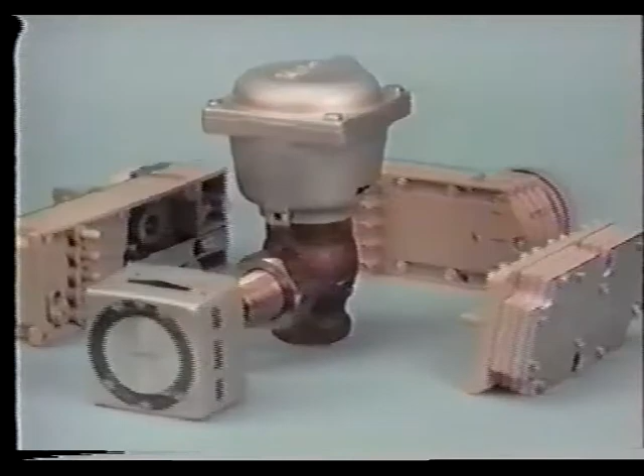Our intent is to cover both the concept and operation of the individual devices used within a commercial pneumatic control system. This discussion will be concerned primarily with Robertshaw devices and other related items.

These include Kellogg air compressors and refrigerated air dryers, Watts regulators and filtration devices, which are manufactured by our sister companies. The principles involved in this discussion apply to competitive devices as well.

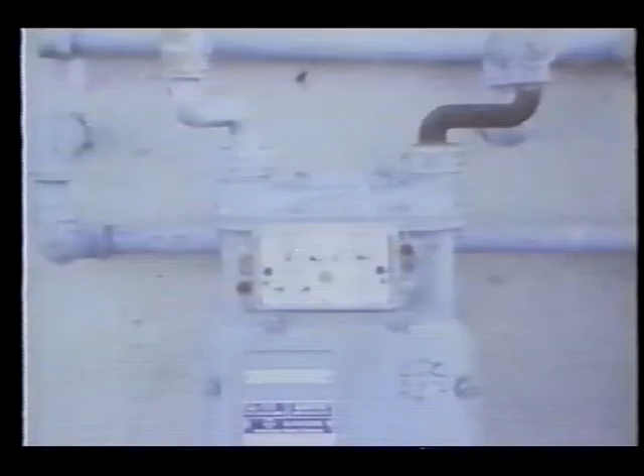Pneumatic controls are used primarily in commercial and institutional buildings. In recent years, the need for more energy-efficient control has become a major concern.

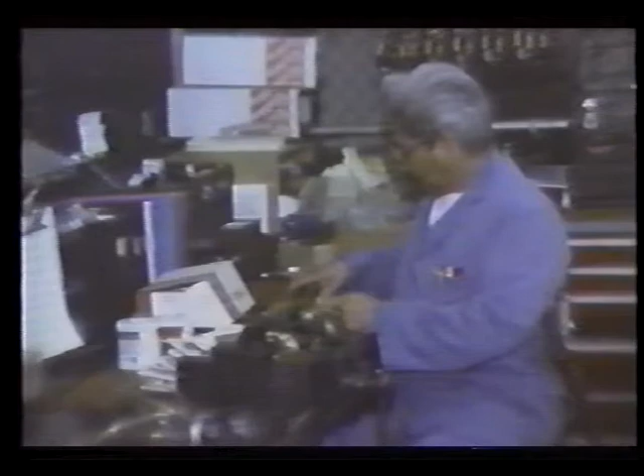In commercial or industrial buildings of a few thousand to several hundred thousand square feet, efficient control of energy is vital. Additionally, these installations have varying comfort demands that may involve the control of many individual systems and subsystems.

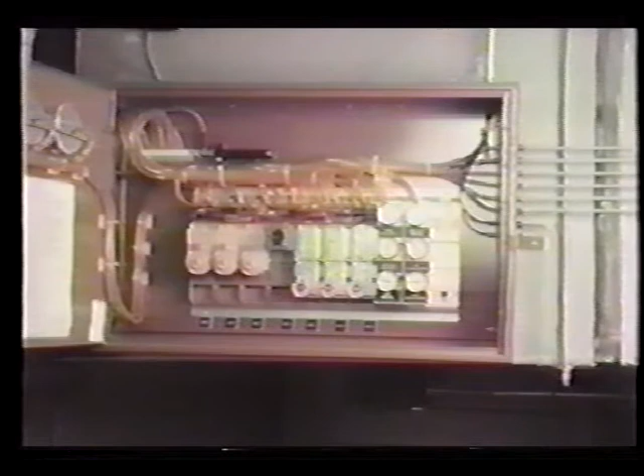Robertshaw pneumatic control systems provide an efficient method of control used in commercial applications because they can adequately meet the changing comfort demands in increasingly complex building designs.

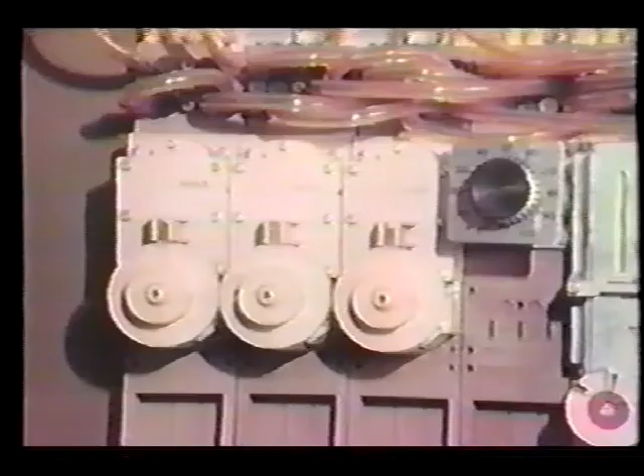Our controls are able to meet modern requirements for many reasons, including the ability to modulate, lower initial cost, ease of installation, and long life.

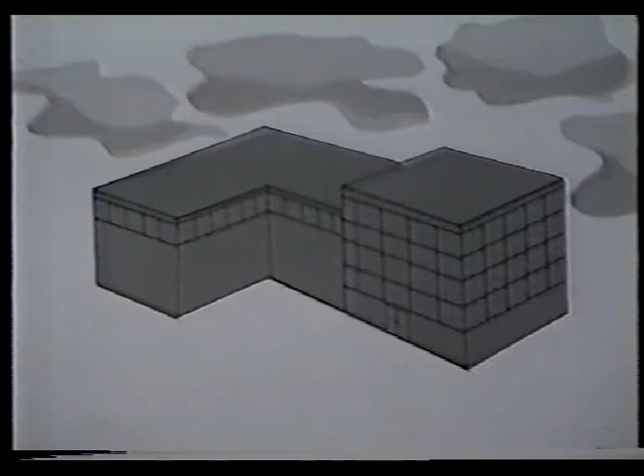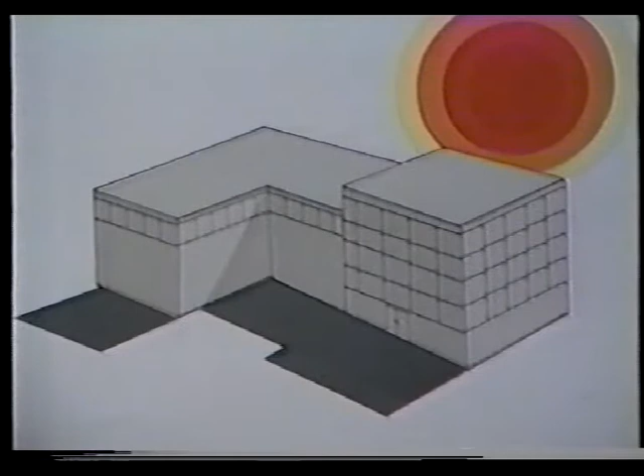The ability of pneumatic controls to modulate allows the control system to adapt to varying loads, thus providing the required degree of comfort. To illustrate the ability to modulate, let's compare it with on-off control of a damper.

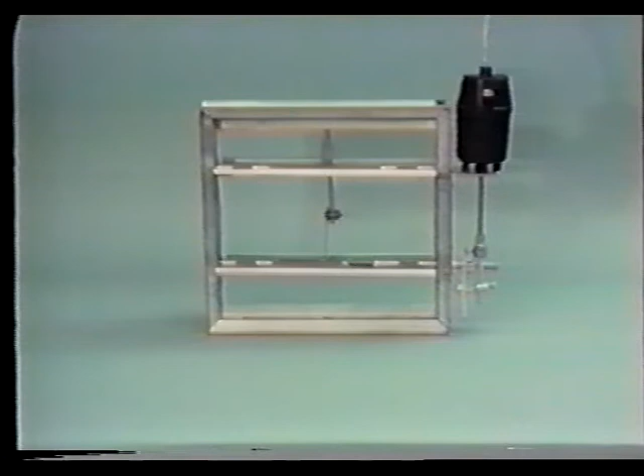Let's compare that to the motion of a modulating damper. Notice the slight movements rather than the sudden opening or closing. These slight movements represent a gradual response to the change in demand and allow only enough flow to meet the need.

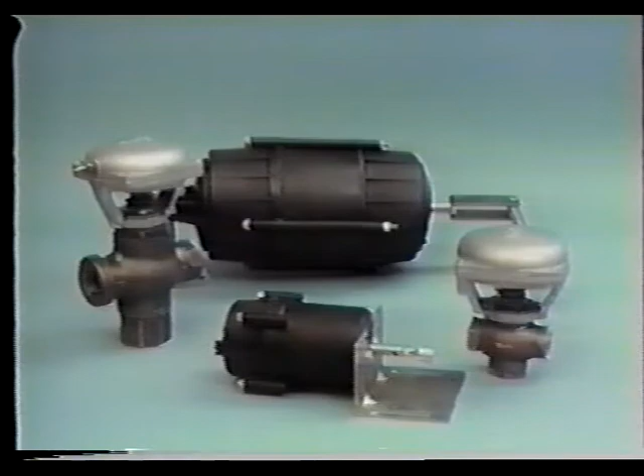Individual pneumatic devices are generally less expensive than similar electric or electronic items, particularly damper actuators and valves. The cost savings on these individual items in a system more than offset the cost of the compressor station.

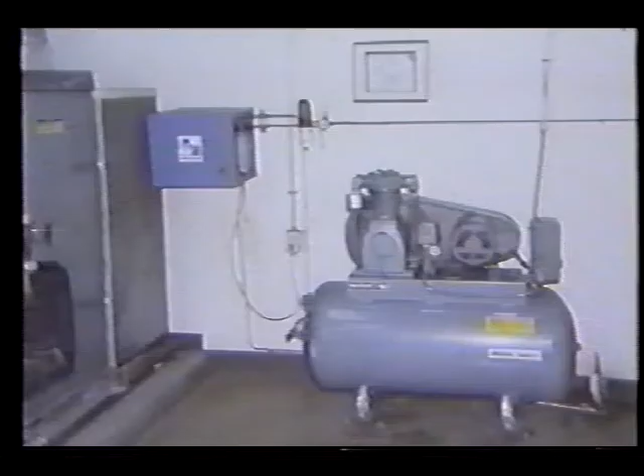Installation of a pneumatic system is often less expensive than a similar electrical system. This is particularly true in areas where building codes require all low-voltage wiring to be run in conduit.

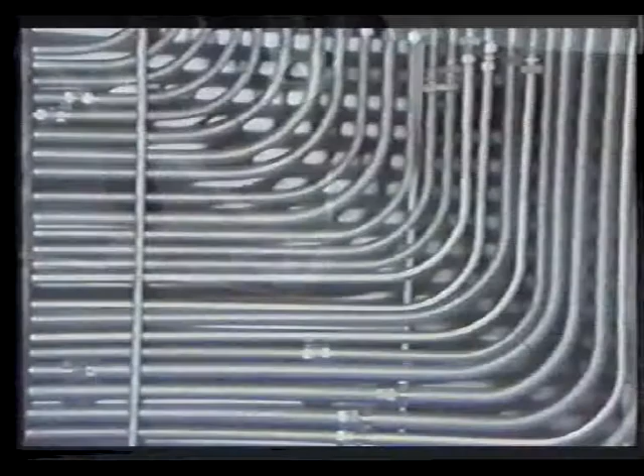The larger the system, the more economical pneumatic controls become. A pneumatic control system that is properly installed and maintained will provide long-term reliability and savings.

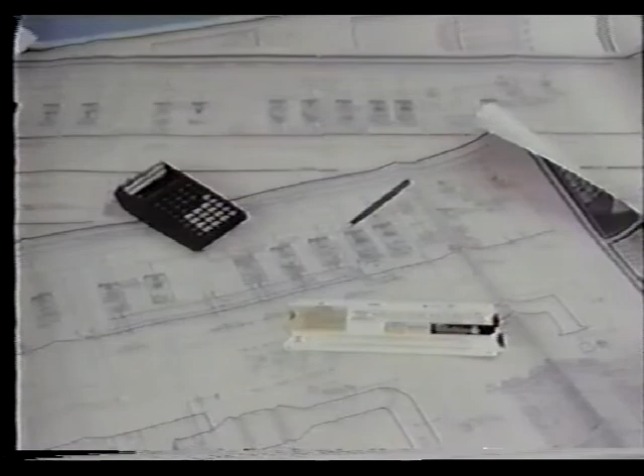The purpose of this presentation is to simplify the operation of complex pneumatic systems. We'll achieve this by taking a system and reducing it to the operation and application of the individual devices.

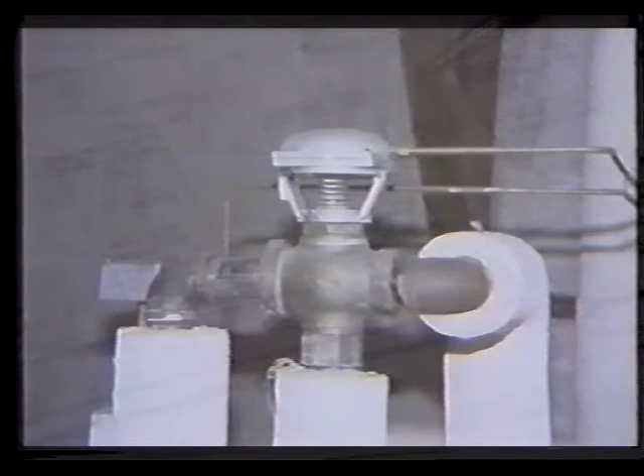By using this simplified method and simple components, even the most complex control strategy can be achieved with reliability and accuracy. The components of a pneumatic control system include an air supply and a mixture of controllers, relays, and switches operating as controlled and controlling units to produce a desired effect.

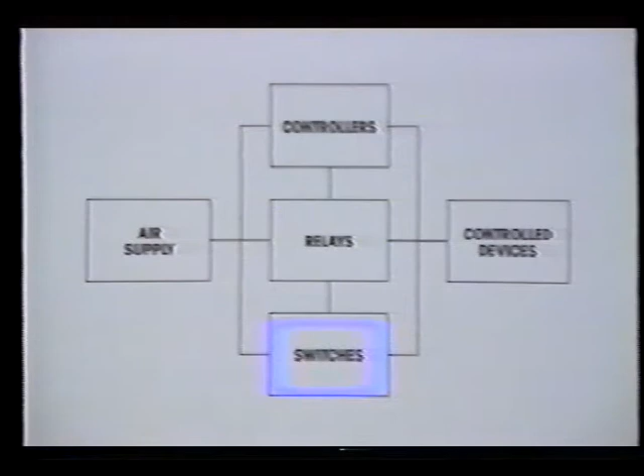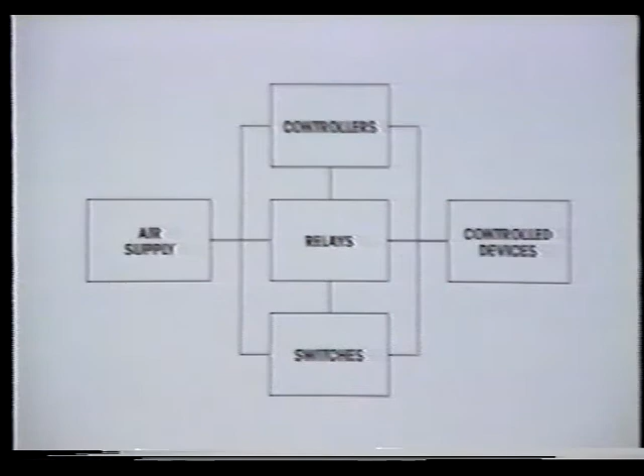The power for a pneumatic control system is derived from compressed air. Air as a power source can be compared to the supply of electricity at a given voltage, which powers an electric or electronic control system.

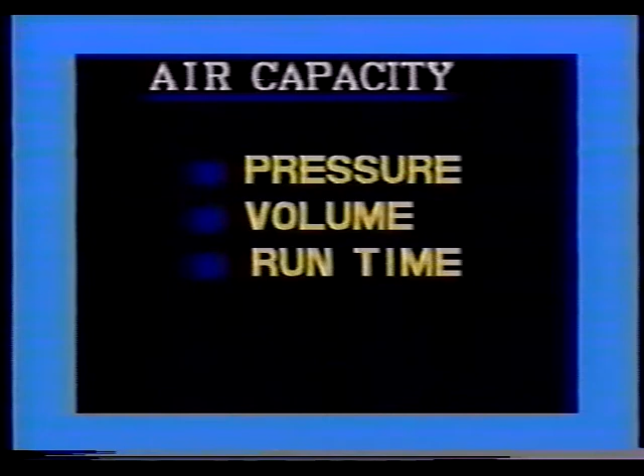Most pneumatic control systems require a constant pressure between 15 and 25 psig to operate properly.

This pressure must be stable, however, it will tolerate minor fluctuations when devices change position and air is bled off to the atmosphere. The volume of air required in a pneumatic control system is determined by the air usage of the devices in that system.

Air volume is measured in standard cubic feet per minute or standard cubic inches per minute.

Air mains and branch lines within the system must be sized to provide an adequate volume of air to remote areas without excessive pressure losses.

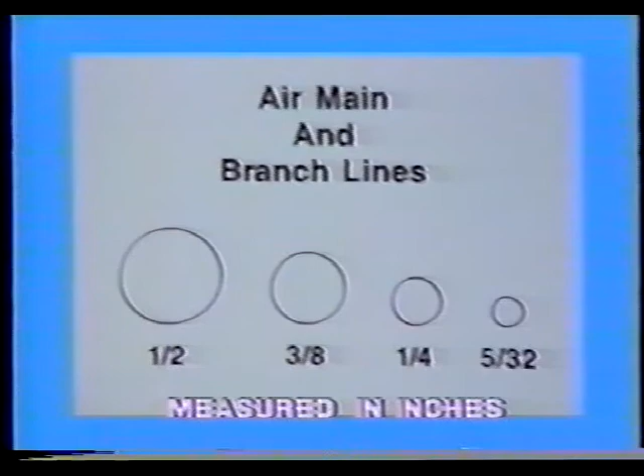Compressors and their receiver tanks are generally sized so that the compressor does not run more than 1/3 to 1/2 of the time. The primary system or compressor station is made up of a number of individual components to provide clean, dry, and oil-free air to the pneumatic control system.

Let's take a moment and discuss the individual components of the compressor station.

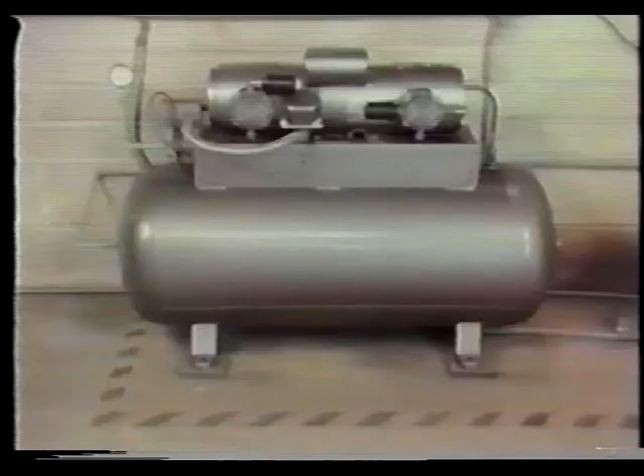Compressors used for a pneumatic temperature control system are often referred to as temperature control compressors or instrument air compressors. Temperature control compressors generally run at a lower RPM. This contributes to cooler running temperatures, less oil carryover into the compressed air supply, and longer life of the compressor.

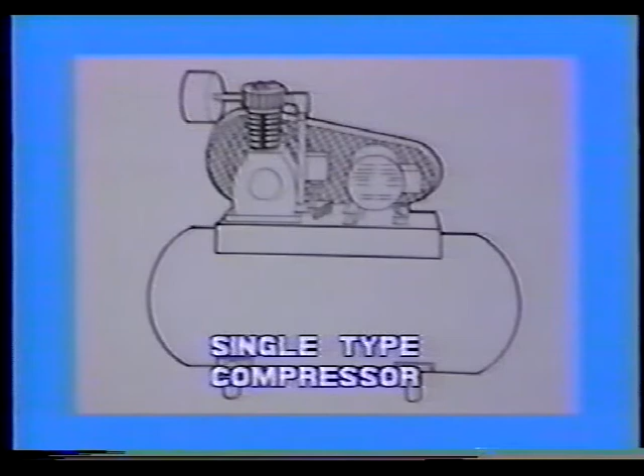A variety of sizes and configurations may be found, with single compressors on smaller systems and duplex type units on larger systems to allow for alternate compressor operation. Most pneumatic systems can be serviced with a compressor rated less than 25 horsepower.

Most compressors are piston-style reciprocating units. There are three basic types of reciprocating compressors: oil-lubricated, oil-free, and oil-less. The common type seen in the field is the oil-lubricated variety.

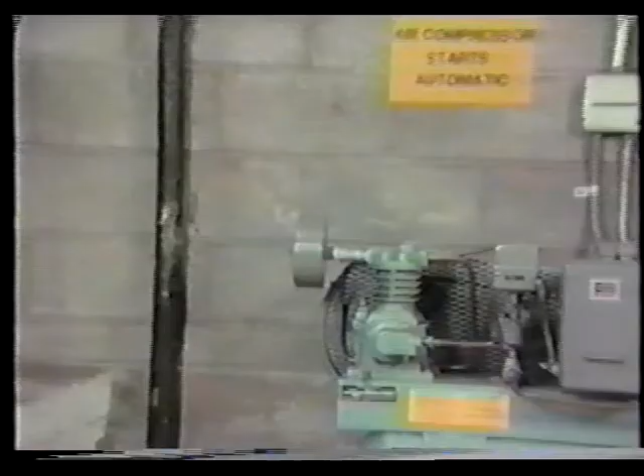Primary air intake to the compressors should be filtered to remove particulate matter found in the atmosphere.

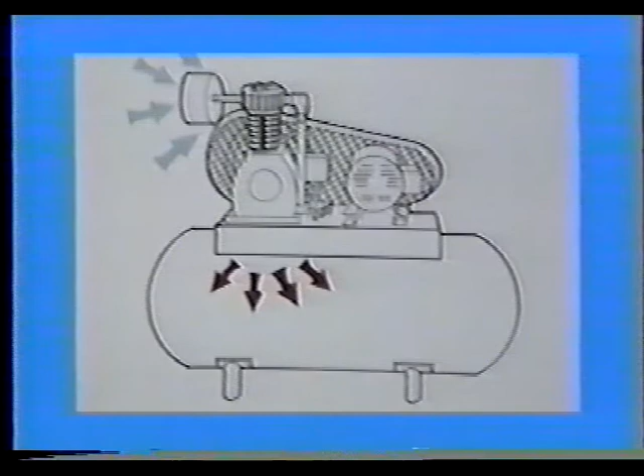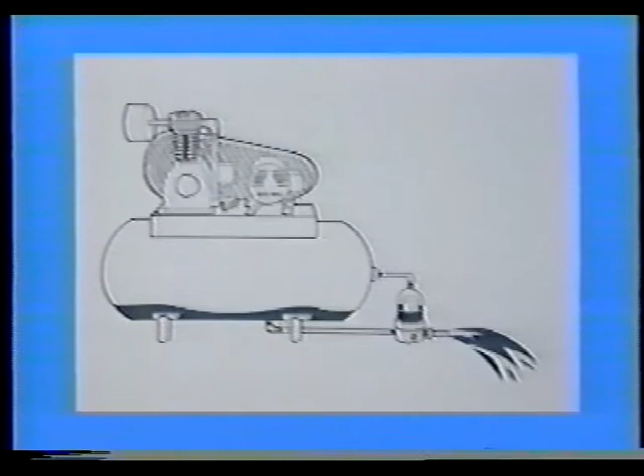Air is heated when it is compressed. As the air cools in the receiver tank, water and oil vapor will condense, creating a liquid buildup in the receiver tank. Most of these contaminants can be removed by the automatic drain trap that should always be installed on the receiver tank. Automatic drains help reduce the need for constant attention.

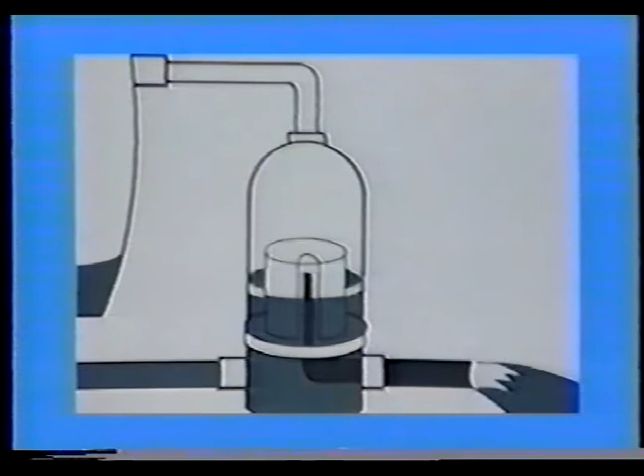However, even an automatic drain should be checked periodically for proper operation.

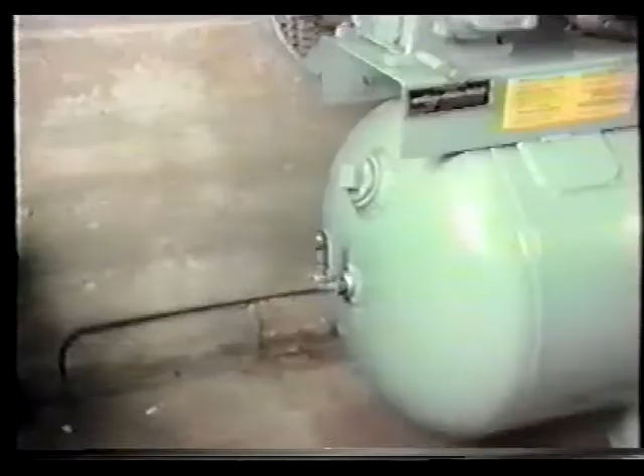The receiver tank is also equipped with a pressure switch to control compressor operation between a pre-selected cut-in and cut-out set point. A pressure relief valve is installed to protect the receiver from pressure switch failure.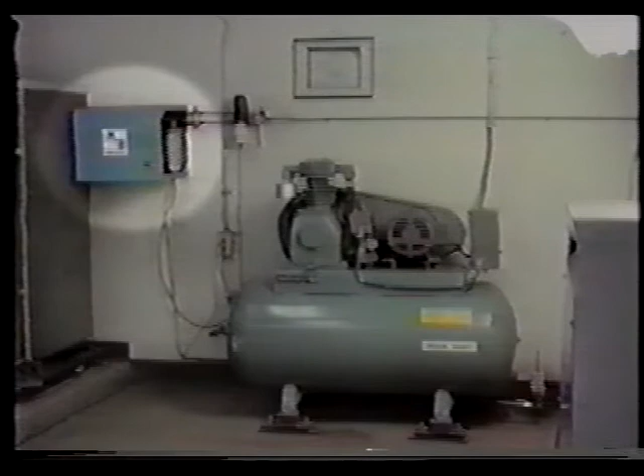The next major component in the compressor station is the refrigerated air dryer. While some older systems may not have this device installed, it is highly recommended. It is the most effective method of removing moisture from the air. Let's take a look at this component and its accessories.

The refrigerated air dryer is used to further cool the air as it leaves the receiver tank. This removes any moisture that is not condensed out in the receiver tank by lowering the temperature to dew point.

The damp compressed air enters the refrigerated air dryer at the inlet port. As the air passes through a heat exchanger, its temperature is reduced, condensing the moisture out of the air. This condensate is then collected in a moisture separator at the outlet of the air dryer.

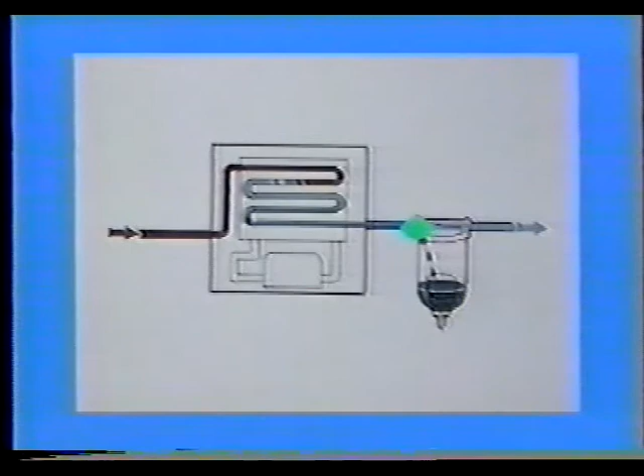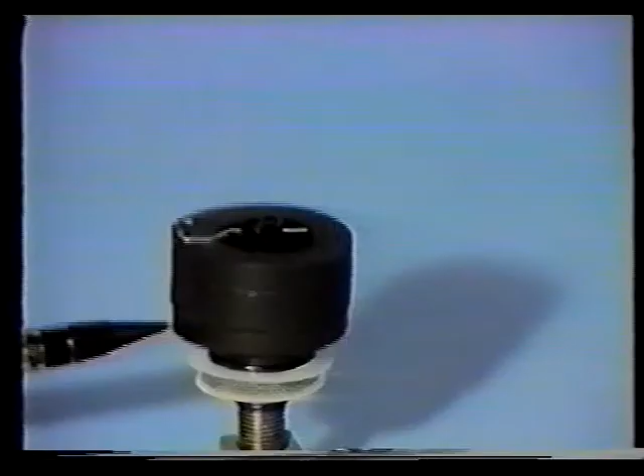This moisture separator is generally a condensate drain that relieves itself of collected water. This is accomplished automatically by a float mechanism, which should be checked periodically for proper operation. Adequate service valves should be installed so that the dryer can be removed for service.

The next major component in the compressor station is the oil removal filter. No matter how good a compressor is, there usually will be some minute amounts of oil carryover into the compressed air supply.

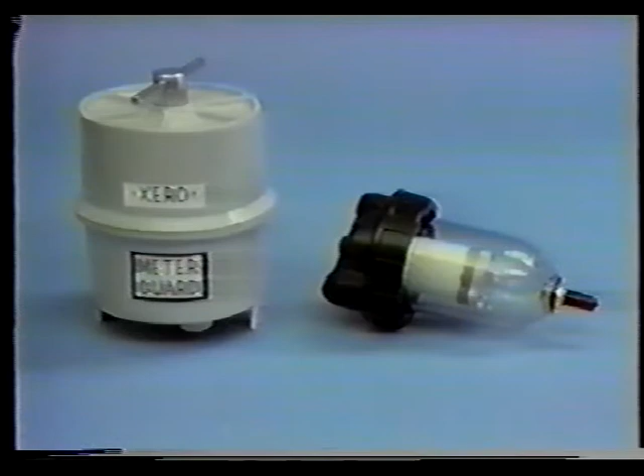Let's take a look at some typical oil removal filters. There are two types of oil removal filters. One is an absorbent type that uses a paper element to absorb oil particulates as air passes through it.

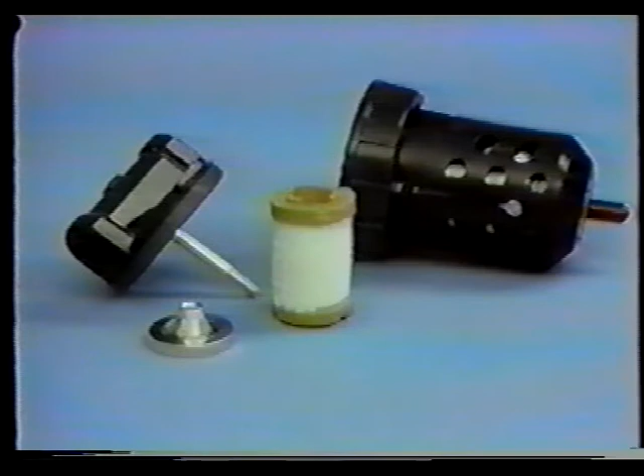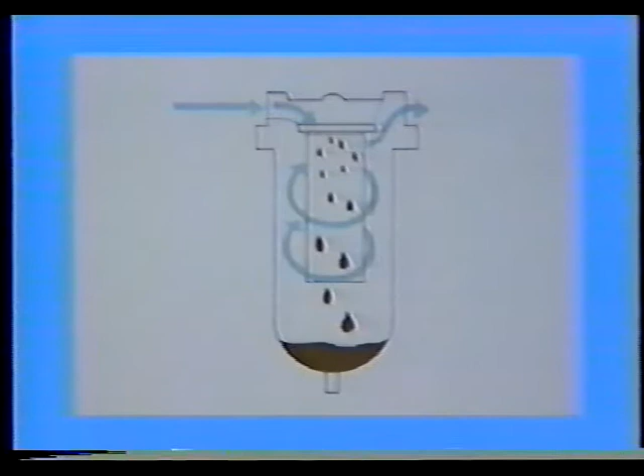The other is a coalescent type, available in either manual or auto-drain models. The coalescent type uses a fiber mesh design filter element and the spinning action of filtered air to impact oil particles on the element. The submicron droplets of oil coalesce to form larger drops that migrate to the bottom of the element. These drops fall from the element and are trapped in the bowl.

Coalescent oil filters are recommended for this type of application because of their ability to remove more oil from the air supply.

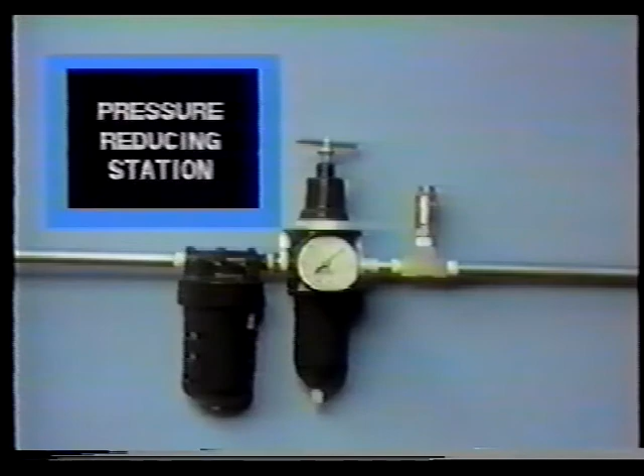The last major area of compressor station design involves the filter regulators, gauges, and pressure relief valve. It is necessary to reduce this pressure down to a working level between 15 and 25 psig. This is done with a pressure regulator.

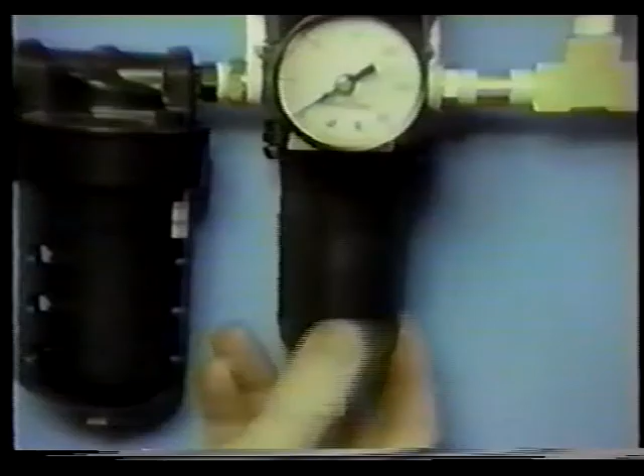Most often a combination filter and regulator is used with a 5-micron filter element. This removes particulates from the air. This pressure regulator should be sized to provide an adequate air volume at the desired system pressure.

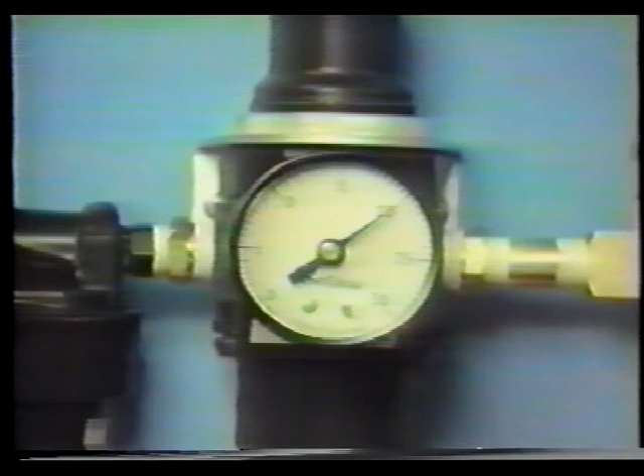Installed on the regulator is a pressure gauge showing the downstream pressure. The regulator is set for 20 psig. Most pneumatic controls are rated for a maximum of 30 psig main air pressure.

Because of this, a pressure relief valve preset for 30 psig should be installed. This valve will open and relieve any pressure in excess of 30 psig.

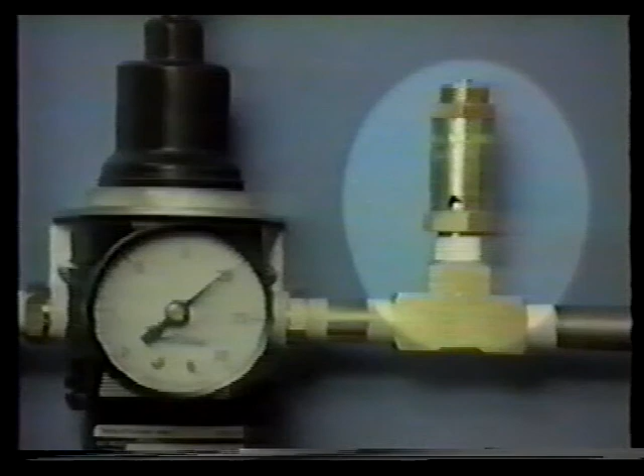This concludes the video material for Section 1, the air station.